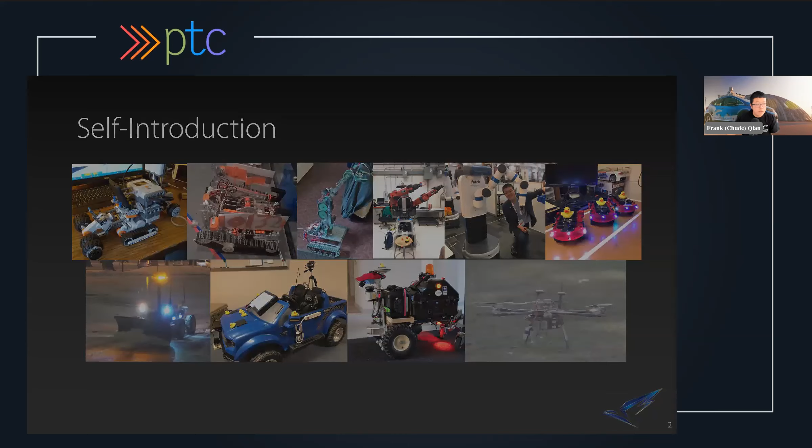So a little bit of background about aUToronto. What aUToronto does - we are a student-run autonomous vehicles team. The composition of the team is 100% student, plus some faculty advisors and advisors from General Motors. So we are actually a competition team sponsored by GM, which you can also see on my virtual background. That's the vehicle General Motors donated - it's a Chevy Bolt, 2017 model Chevy Bolt EV, and we modified it into, I will say, an autonomous vehicle under certain operation design domain.

So we get to go to Michigan actually a couple of weeks ago, and then participate in the competition. This is our 5th year that we have won, and this year we have won every single category except for 2 that we didn't win first place. So we won 2nd place, and the other we won 3rd place. So we have a very good track record.

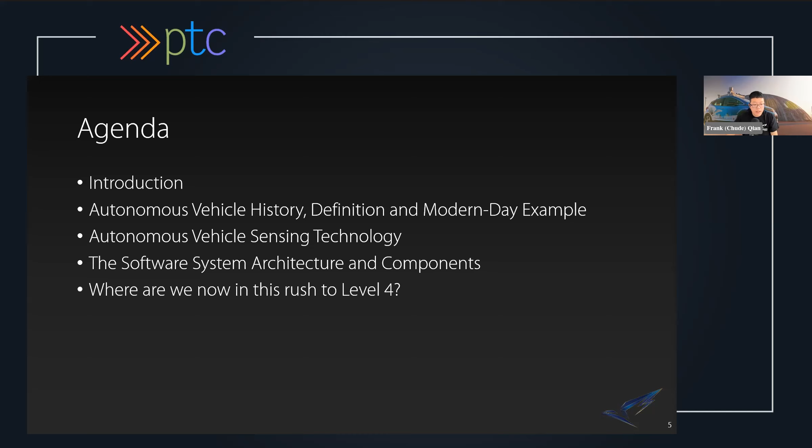So with that being said, let's start with talking about a little bit about autonomous vehicles - the history, the definition, and examples.

In contrary to most people's understanding, autonomous vehicles actually started way back in the early 1980s, where a couple of industry pioneers started developing hands-off autonomous vehicle systems. Namely, in the 1980s, Carnegie Mellon University developed a vehicle platform called NavLab, the leftmost vehicle, modified from what I think was a minivan. The vehicle performed only one task by then, and it was already a huge groundbreaker.

What it does is basically keep the vehicle within the lane. That's all it does. Compared to modern day technology, if you buy a car in recent years, it's sold as the feature of lane keep assist. It's also, if I recall correctly, a single agent system, meaning it assumes there are no other road agents such as vehicles or pedestrians. It's only by itself, and all it does is keep within the lane.

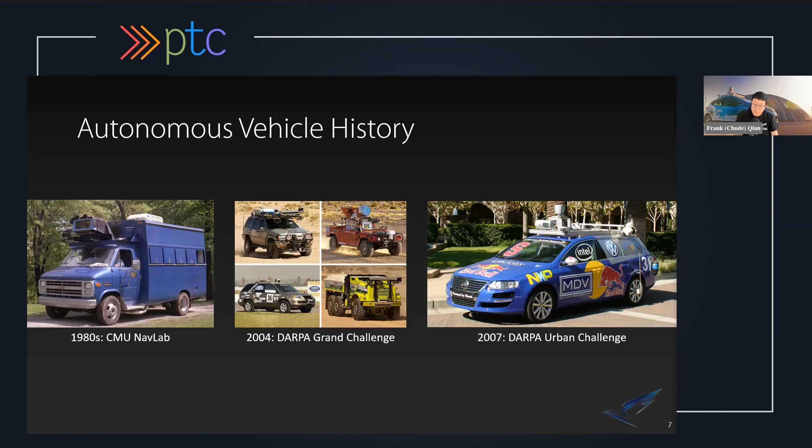This, I think, is featuring Stanford's submission for the DARPA Grand Challenge, and a lot of groundbreaking technology such as multi-line LiDARs were facilitated utilizing this competition. That brings us to 2012, where Google Project X started publicly testing their autonomous vehicle project, although development actually started right after the DARPA Urban Challenge. So the DARPA Urban Challenge, in certain people's minds including mine, is sort of the ground zero of modern day autonomous vehicle development.

In 2018, Waymo became the first company among a few others to start publicly testing the concept of an autonomous rideshare system in certain areas under an operation design domain. I'll talk about that concept a little bit later. But in a specific area, I think Phoenix, Arizona, they tested their systems and allowed users to ride their vehicles with a safety driver in the seat.

In the same year, something super unfortunate happened in the US: the first fatality accident on a level 4 autonomous vehicle. The vehicle was owned by Uber ATG. This also became a turning point in the discussion, shifting from just building an autonomous vehicle quicker to win the arms race, to more reflection on safety in autonomous vehicles.

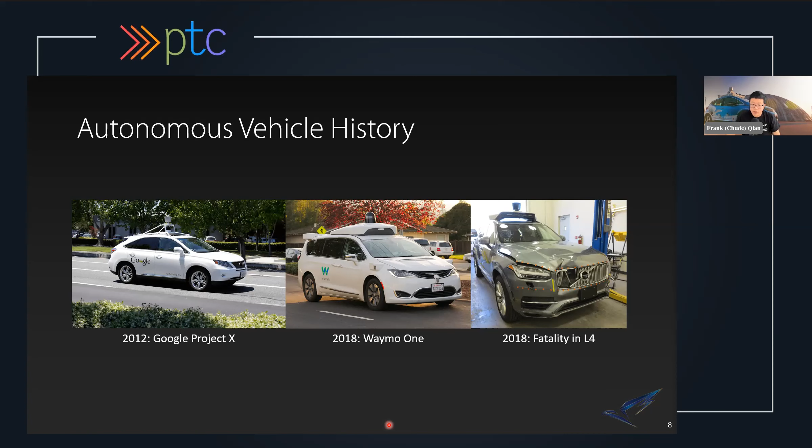Fast forward to 2022, the safety of autonomous vehicles is still a very crucial aspect and discussion point on the topic of autonomous vehicles.

I mentioned the term level 4. The level is actually a definition of autonomous vehicle autonomy by SAE International, Society of Automotive Engineers, which is like a governing organization on automotive engineering. They define 6 levels of autonomy in a vehicle.

For level 0 to level 2, on a high level summary, as a driver you still need to pay 100% attention on the road and constantly supervise the vehicle. You cannot zone out or not drive the car for a prolonged period. The car in level 2 might have features such as steering and brake acceleration support, like following in a traffic jam with stop and go, or lane centering, which keeps your car in the center of the lane. A keyword you might hear if you buy a vehicle recently for an add-on feature is adaptive cruise control.

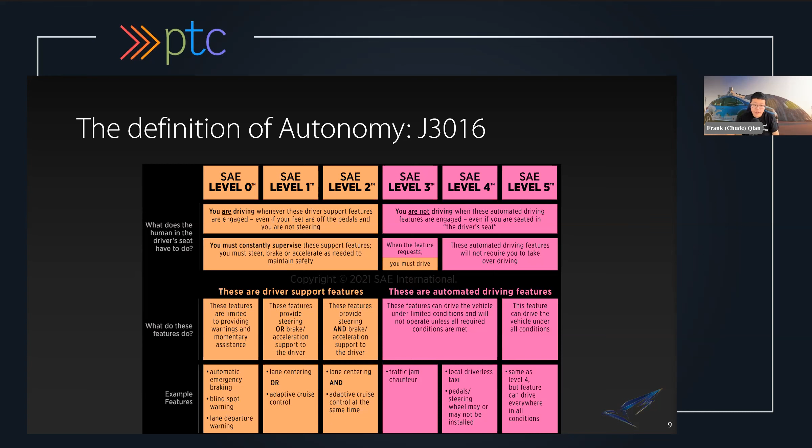So for modern day autonomous vehicles, or more specifically modern day autonomous rideshare systems, there are a couple big players. Waymo, formerly known as Google Project X, was the first to start. They started in Phoenix, Arizona, and I think they have now moved further to San Francisco, California, and a couple other regions for small-scale testing.

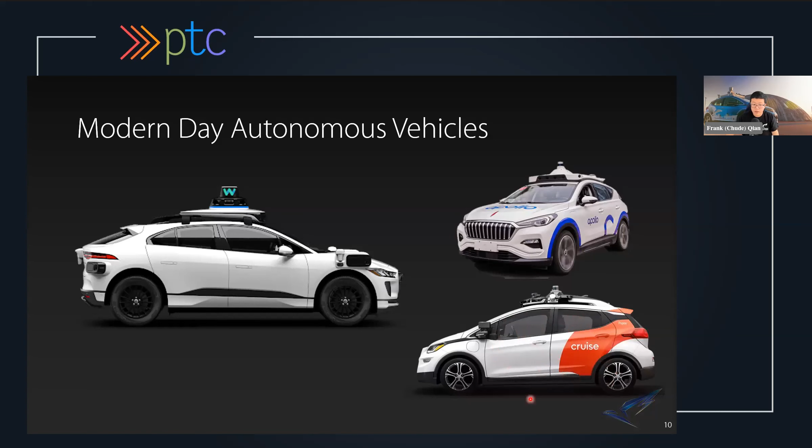Two new players rose up in recent years: Apollo, a company from China under Baidu, and Cruise under General Motors. Both of them started publicly offering rideshare in a given geographical region earlier this year. If you look very closely, you'll notice the Cruise car is also based on a 2017 Bolt EV, similar to what we have for our Zeus vehicles. So there are a couple things in common, and a handful of things that are totally different, comparatively speaking.

At this point, people in the audience are probably thinking, well, what about Tesla? As of a couple days ago, Tesla's autopilot system was actually being openly investigated by NHTSA, the governing agency for the safety system. One interesting aspect of Tesla's approach to safety was that, on average in Tesla's crashes, autopilot aborted vehicle control less than 1 second before the first impact. What that means is, technically speaking, their vehicle was not in autonomous driving when the collision happened.

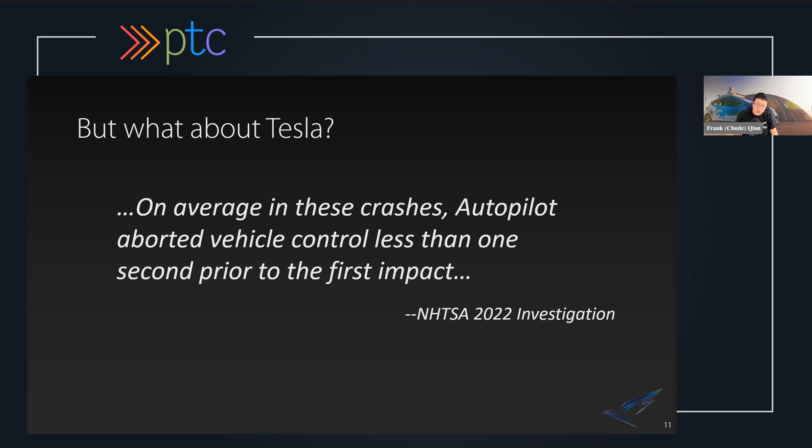So their track record, technically speaking, should be good. But in all honesty, this is very reckless and irresponsible behavior on Tesla's part. And in actuality, at least within academia, Tesla's approach sits at most at level 2.5 autonomy. There's plenty of reports and research on that front.

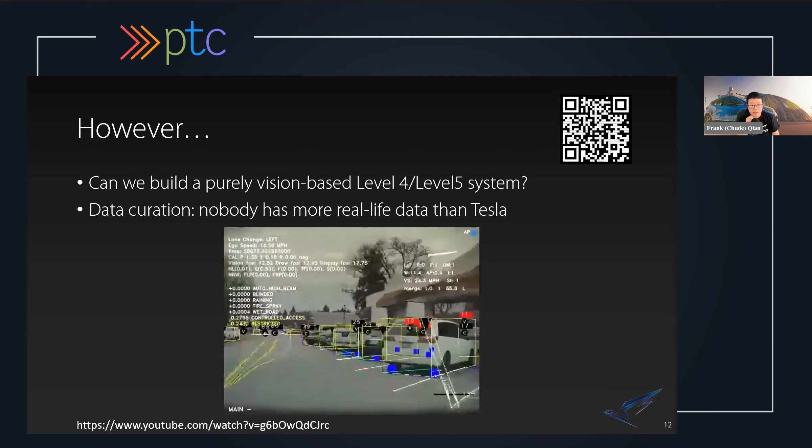But we do have to give Tesla some credit for their system design and approach. I have a QR code up there that links to a talk given by Tesla's head of vision engineering. It's a pretty remarkable system that they were able to build with only a camera system. This prompts a bigger discussion: what sensors do we actually need to build autonomous vehicles? Can we build a fully autonomous vehicle with only camera systems? Because we human drivers only use our eyes, which is somewhat comparable, in a horrible way, to a camera, but our human eyes can do much more than what a camera can do.

Another very interesting aspect we shouldn't disregard, even though Tesla's marketing team has been sort of falsely advertising their product, is the actual potential for Tesla as an entity with their data collection on all these vehicles already on the road. They have the largest fleet in the world across all autonomy companies. So they can do a lot if they can solve the problem of generalization in vision, and potentially change the way we see autonomy sensor systems. But for now, they remain what they are: a very cool company with an over-exaggerated marketing scheme.

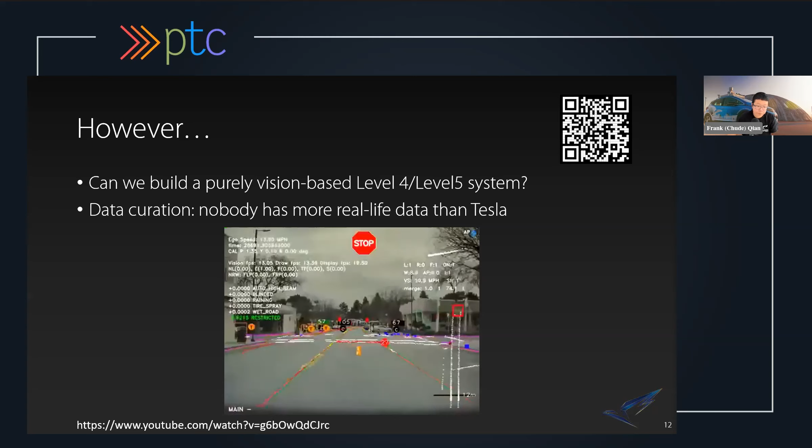Another question when you talk about autonomous vehicles that has to be addressed is, why autonomous driving? Why would we want to give up the fun, per some people's mind, of driving to autonomous systems? It turns out there are multiple studies that can back this theory, that autonomous driving can further improve road safety. If the implementation is done right, the reaction time for an autonomous vehicle is much faster compared to a human driver.

It can also increase productivity. Imagine one day when level 5 autonomy is out there and you don't actually need to drive. If your commute is 30 minutes to work, for that 30 minutes you can do all sorts of things. But obviously, I strongly urge you not to do that in vehicles these days, because none of them have the capability to deliver the safety idea.

It can also increase accessibility. So for some elderly people where they might have to have someone drive them to some places, they now can use autonomous rideshare vehicles to bring them to where they need to be, such as a doctor's appointment, or just go outside where they're living and have some entertainment.

Autonomous driving can also reduce cost, although this is sort of a double-edged sword, where if you reduce costs by cutting costs from paying a human driver, some people will not be happy and they will lose their jobs. So this becomes a double-edged sword quickly.

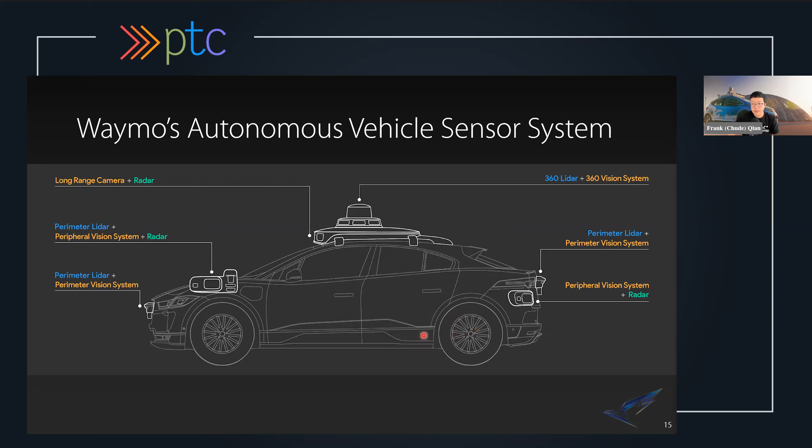So we've seen the impressive one. Let's talk about some of our own design. Keep in mind that the vehicle system we design is participating in a challenge similar to the DARPA challenge, called the SAE AutoDrive Challenge. Basically, 10 universities built their autonomous vehicles, and we tested at University of Michigan's M-City Proving Ground to validate our vehicle's capability. It's a subset of the full autonomous driving problem, as you will see in a couple slides later.

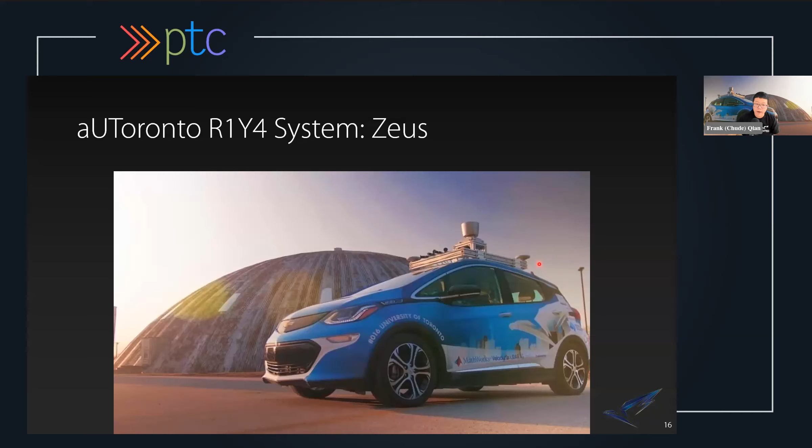What we have is only a sensor system on top of the rack. And if you pay close attention, our sensor system actually mainly focuses only on the front. We don't necessarily perform 360-degree surrounding coverage on our vehicle, since the competition is a single agent competition, meaning other than you, you're the only one driving on the road, and the interaction of your vehicle compared to other road agents is minimal. So that's how we can get away with our design.

It ties into the discussion of ODD, Operational Design Domain, which I will formally define a bit later in the slides.

So our Zeus vehicle system has a Applanix GNSS INS system, a Velodyne HDL64E LiDAR, which for this one, most of the autonomous vehicles you see in 2018, 2019 have that - it's sort of a standard design. And then we have a handful of cameras providing coverage. Note that we actually don't use radar on this version of the design.

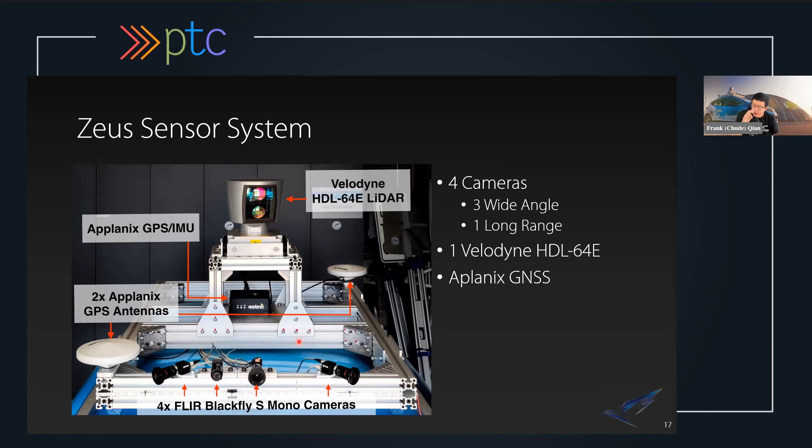Fast forward to this year - it's a 4-year per round competition, so this year marks a new round with some new rules implemented. For lidars, we have to use Cepton's micro motion technology lidar, so we no longer use a giant 360-degree lidar.

This is our test and validation system we designed over the past year, and it has achieved very good results for the competition. The system utilizes 3 lidars on top to provide similar coverage looking in front of the vehicle, the same GNSS-INS unit on the rooftop, and a similar but more compact 4 camera configuration - 3 wide angle and 1 long range camera.

For our radar, we have 3 radars providing coverage on the bumper area, since you don't necessarily have to mount your radar very high, at least for the brand we got. We also put another additional lidar on the bumper to minimize the blind spot. Keep in mind this design is also under budget - what we're doing is a minimal viable design, basically a system designed with the smallest amount of money that can provide the maximum performance.

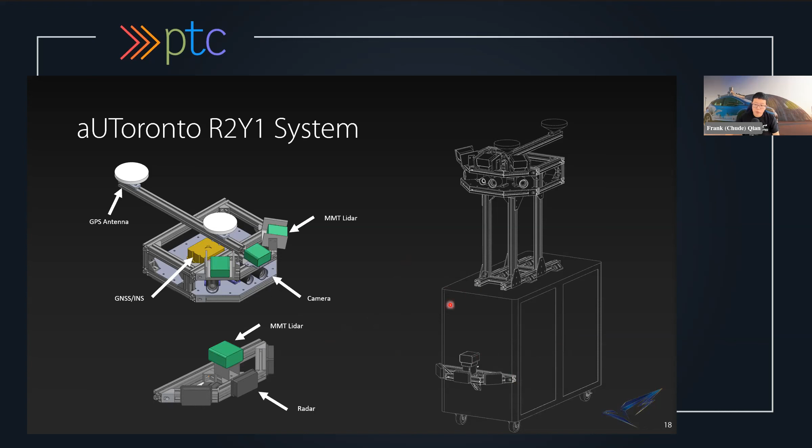So what are we gonna do next? This is probably one of the first times we have shown this publicly - this is our design for next year's competition, where we'll feature more lidars to provide more coverage and minimize more blind spots. We'll use 6 lidars in total, 4 cameras, 3 radars, plus a GNSS-INS system on the vehicle to provide about a full 180-degree coverage in the front. If you look at the 2 slides, you can see the design is pretty much transferable to what we built.

So let's take a look at the sensing technologies one by one.

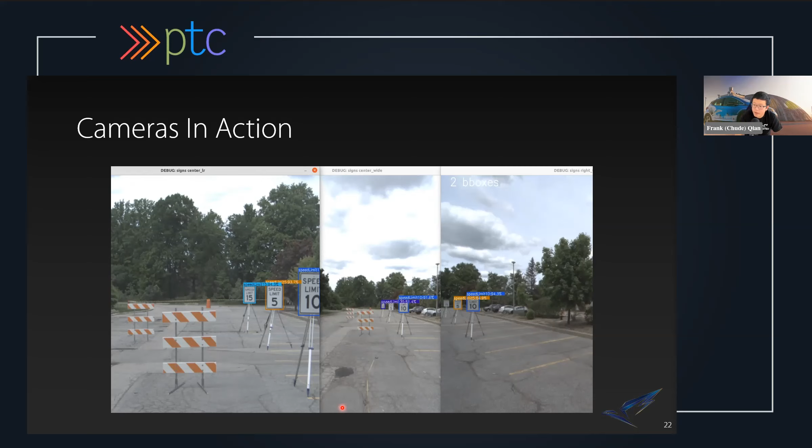Back then, a very popular modality of LiDAR is called spinning LiDAR - there wasn't an actual academia name, it's just what we previously called them. I usually call it spinning LiDAR, which involves a mechanical component that spins around.

How LiDAR works is it shoots out a laser, getting bounced by a movable mirror so you can change the reflection to where you want it to shoot. It shoots at an object, and the laser returns back to the mirror and onto a receiver. Through how long you shoot out this laser beam and how long it takes to travel and bounce back to the receiver, you can very easily tell how far away an object is, and that becomes a point on a point cloud.

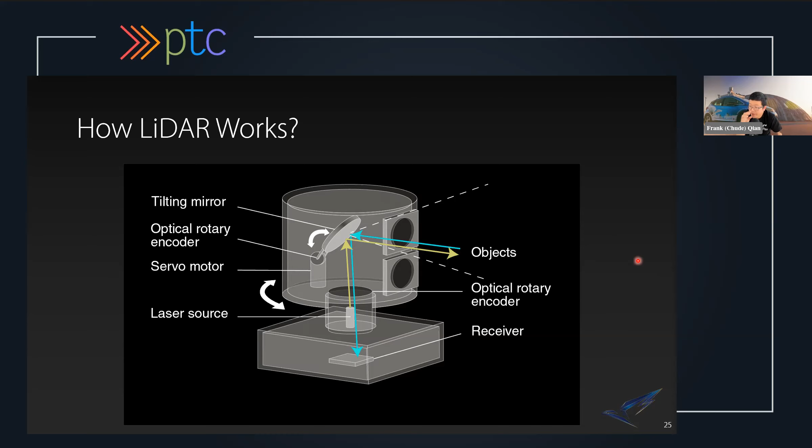So this is another example of the LiDAR on my virtual background. You can see there, and this is how a Velodyne 64 LiDAR works.

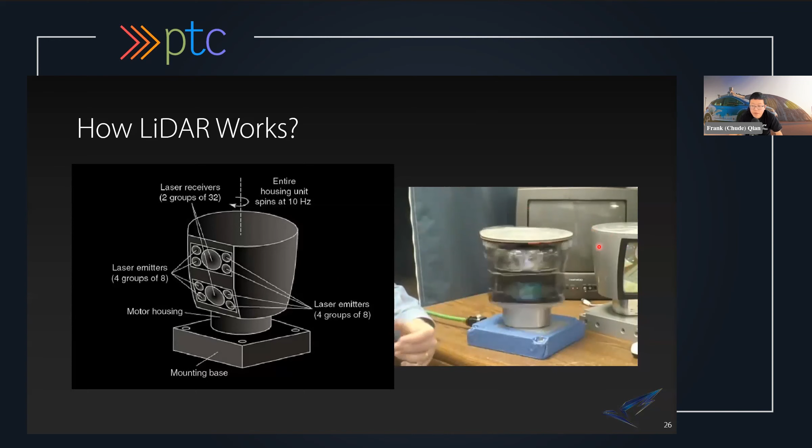It's actually quite an engineering marvel back then. As you can see, it basically spins to provide 360 degree surround view. It uses 4 groups of 8 laser emitters and 2 large receivers, as you can see on the image, to receive the points, and then it spins on top of the vehicle, providing 360 degree LiDAR coverage. This was for a long period of time the standardized industry standard for LiDARs.

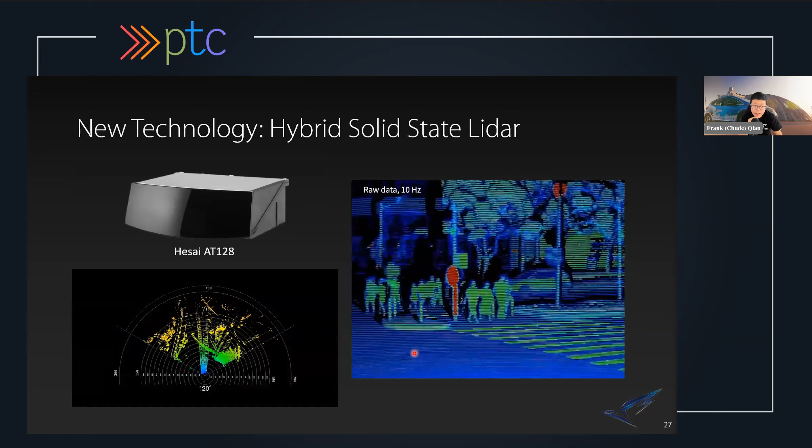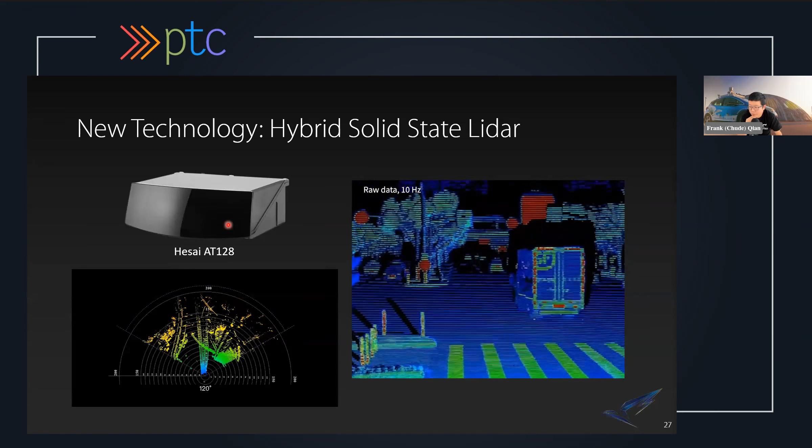However, as you can probably tell, there's a lot of moving mechanical components involved in these LiDARs. So more modern day LiDAR systems involve what's called a solid state LiDAR. A very popular brand these days is Hesai's AT128 LiDAR. In fact, a couple of the car manufacturers already integrated their LiDAR system onto the vehicle, so it's one singular unit. What they have is a MEMS chip to shoot out the laser and receive it. So there are no more major mechanical moving points that can mechanically fatigue over a long period of time, and it's more preferred by automotive applications.

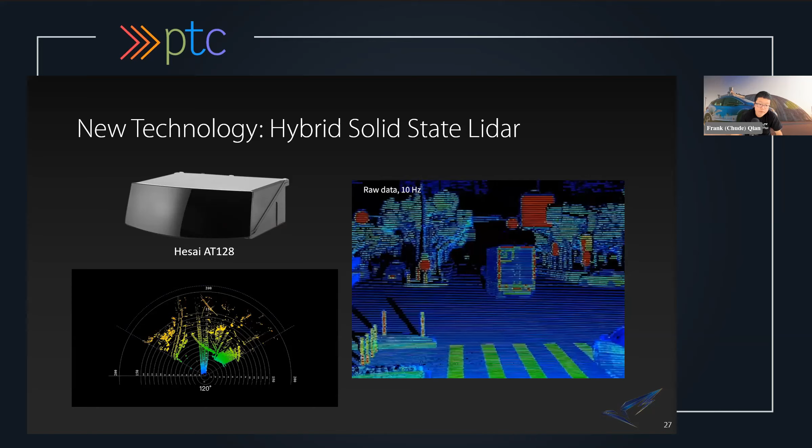For us, what we use this year is a different LiDAR technology called micro mirror technology, in which the LiDAR has mirrors inside that vibrate, and you can see it produces decent enough coverage for the objects, but it has this very interesting grid-like pattern. That's a very unique characteristic of the micro mirror technology, at least in this day and age, by Cepton.

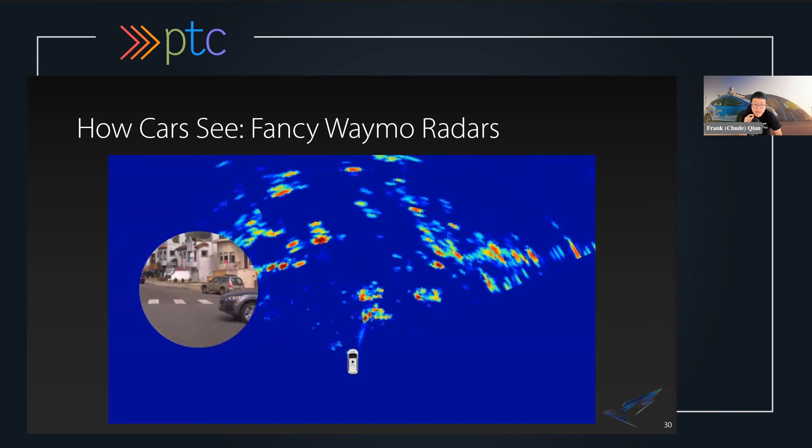Another very popular sensor modality on autonomous vehicles, or a standardized formula autonomous vehicle construction, is a radar system. Unfortunately we're not allowed to talk too much about the specific radar we use, but this is a demonstration on Waymo's vehicle radar system. They actually have a very fancy system that allows you to process the radar information as a Doppler range image, which is more human readable and machine readable compared to what we have.

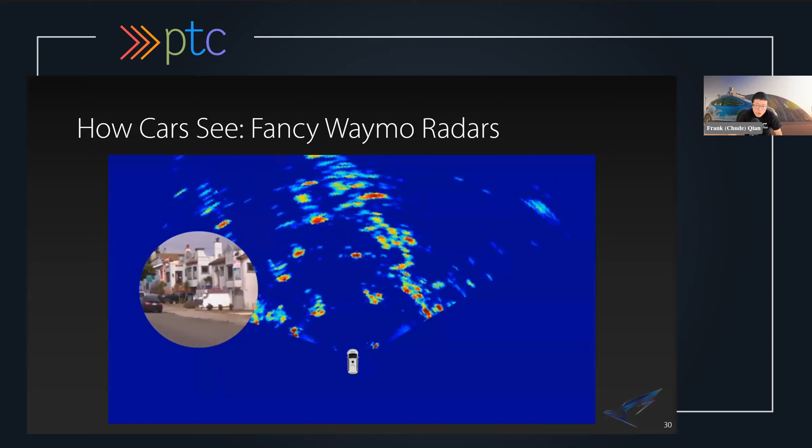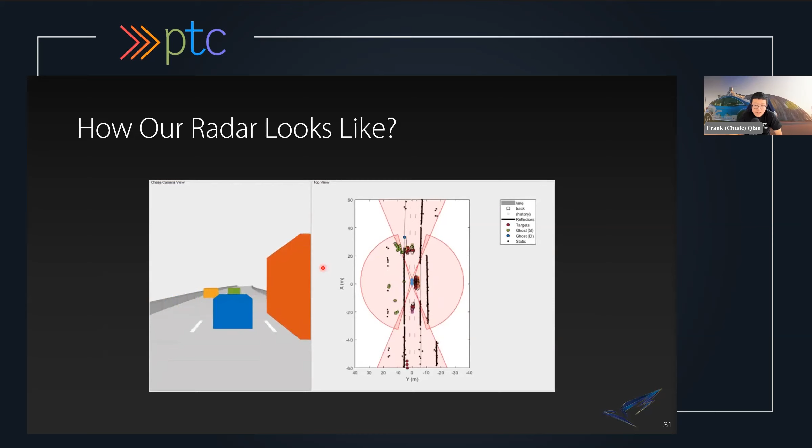What we have is called a radar target point. This is an illustration of radar - you get similar to a point cloud, except these points are much sparser and they float on the surface of objects. With radar, sometimes you get ghosting effects and multipath reflection effects, which are big words, but just think of them as points where they shouldn't be, but they are there.

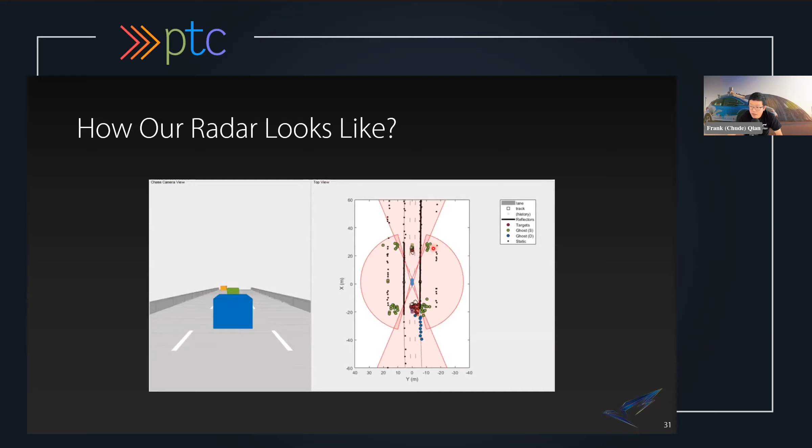For radar, the advantage is that you get back the object's velocity directly alongside its position information. Each of these dots actually contains velocity information that you can read on our radar system.

So how does that work? You can go very deep into the mathematics, or you can easily understand it as: similar to LiDAR, you shoot out a radar 77 gigahertz beam, and when it hits an object, it bounces back. However, if an object is moving, the frequency will change, and through that frequency, or the Doppler effect, you can infer the vehicle's velocity. Think of it as when you're standing on a street and there's a police car with sirens driving fast next to you, you'll hear the tone shift a little bit. That's basically, on a very rudimentary level, the similar idea of how automotive radar gets velocity information - it looks at the frequency shift.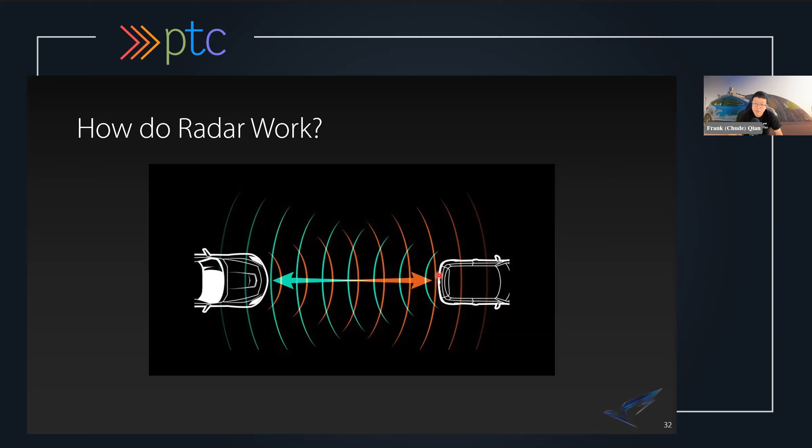For those of you who follow technology, these are very standardized sensing technologies that have been out there since early 2014, 2013 even. Next, I'll show you a little bit of the bleeding edge technology of sensors.

Radar gives you instantaneous velocity. So why don't we combine the two? It turns out you can also use laser to look at a very broad scope of frequency shift in the laser space, and you're able to get both good point clouds as well as the velocity information of each point, which is super nice.

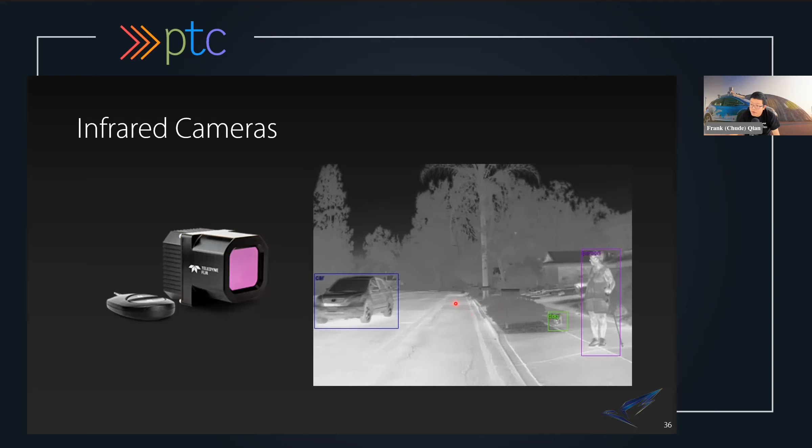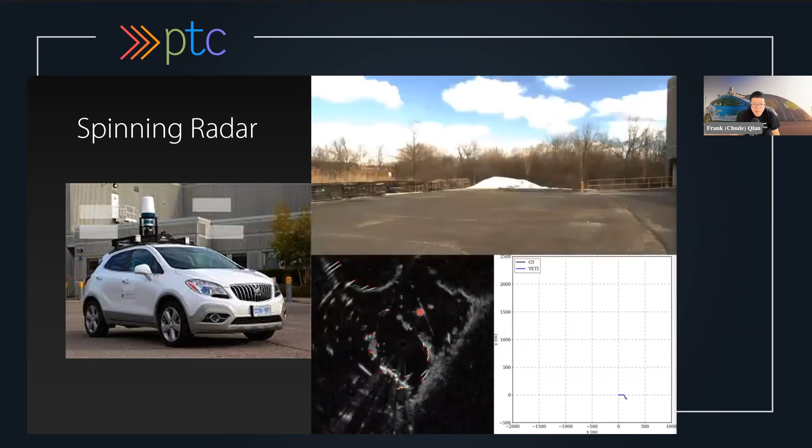And then lastly, there's the spinning radar. It's basically a two-dimensional scan of the environment using radar technology. As you can see here, you can roughly tell the outline shape of the object. This is one of the test vehicles U of T has, called Boreas. As you can see, you can pretty much tell where the objects are, similar to LiDAR, but this is in a radar sort of domain.

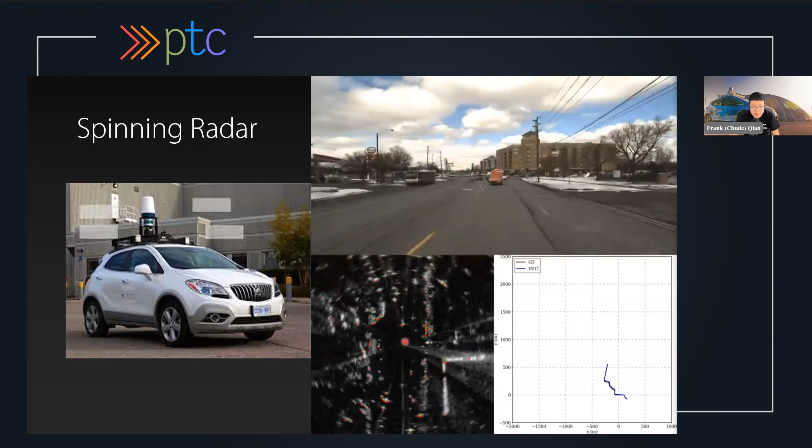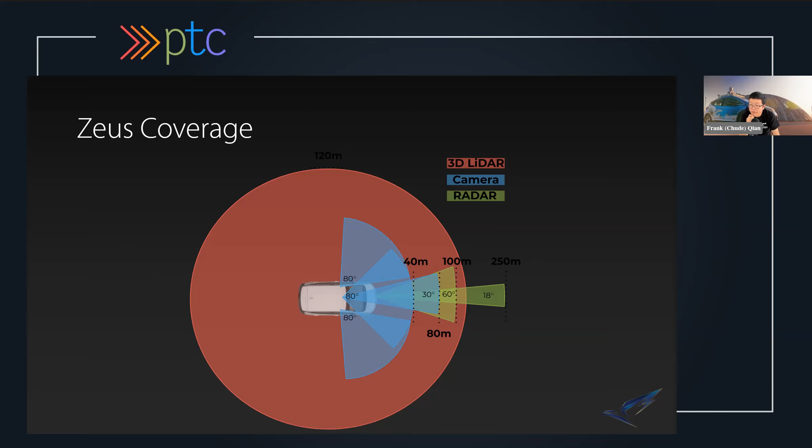When talking about designing a sensor suite for an autonomous vehicle, another very important aspect you need to think about is sensor coverage. Waymo has full 360 coverage, nooks and crannies around the vehicle. For our vehicle, Zeus, we have 360-degree coverage introduced by LiDAR. Our camera only covers the front 180. We did attempt to put radar on there, but eventually we didn't use that. So that's the Zeus coverage.

And then for the perception cart's coverage, you can see here. Our cameras provide about 160 degrees horizontal field of view. Radar is about 180, and then LiDAR is about 150. This is all the sensors - for the camera and LiDAR, this is analyzed using the top sensor rack, and the radar is using the bottom one.

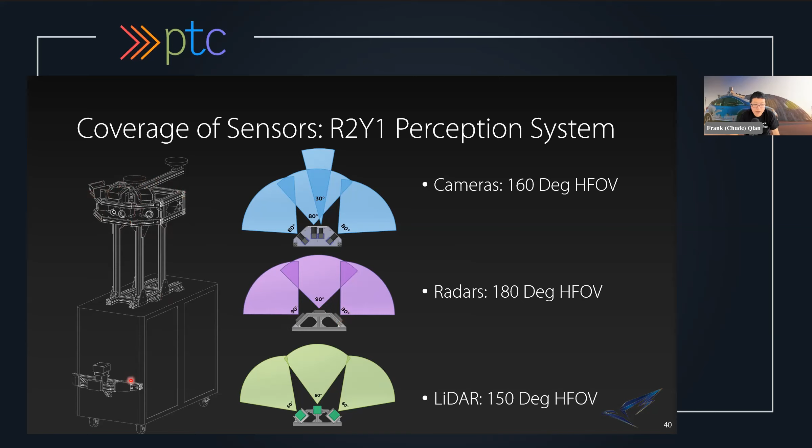So how can we get away with only having that little sensor compared to Waymo's design? Well, I have to introduce the concept of operation design domain. Operation design domain basically defines a set of operation areas that your vehicle is expected to handle and operate in. For our scenario, it's very simple - it's based on whatever the competition gives us. All we need to do is drive within the lane, detect traffic lights, handle pedestrians crossing the crosswalk, with only one pedestrian expected at a given time, and handle deer jumping out of the road in front of our vehicle. So that is our operation design domain.

I previously mentioned that for actual autonomous vehicle companies, there's also a geographical fence idea where Phoenix, Arizona is the first area validated because it's most likely always sunny there. Although Waymo nowadays has also expanded their weather coverage to pretty much everything, a safe approach is you define your operation design domain, validate it rigorously, and then slowly expand your operation domain. That's why we get away with what we have, and that's a very important concept in autonomous vehicles. In the upcoming years, you'll see cars selling autonomous driving features, but they only support certain areas of a geographical region, bounded by the operation design domain. Some cars might not work under rainy or snowy weather. So that's an important thing to look out for.

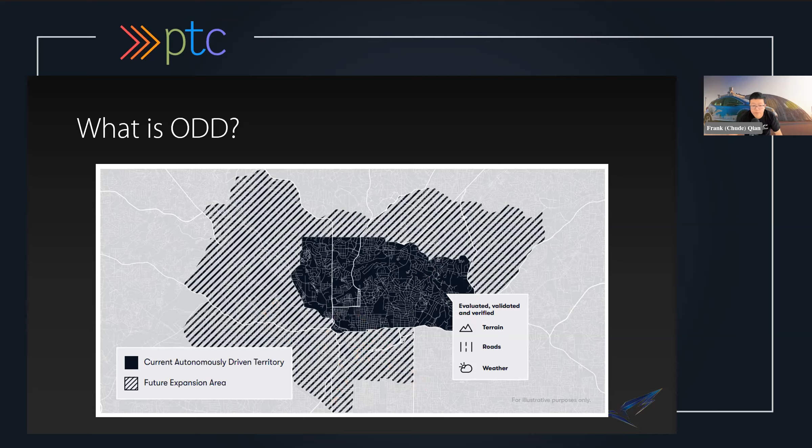So a very basic robotics system can be defined as follows. You have a world or a plant, you have your sensors on your vehicle, you have your actual vehicle, and you have the actuator or motors or execution components on your vehicle. Your sensors look at the world and do something called perception, or perceive the world. From the outcome of the perception, you make a plan based on the perception. You hand it over to control, and the control executes the plan, and rinse and repeat.

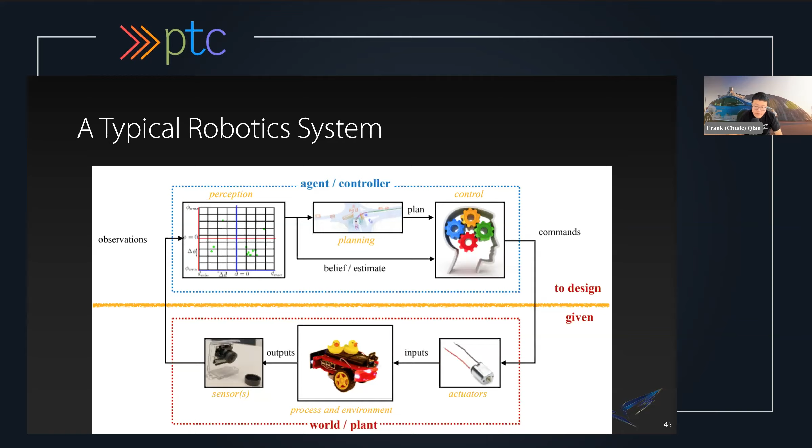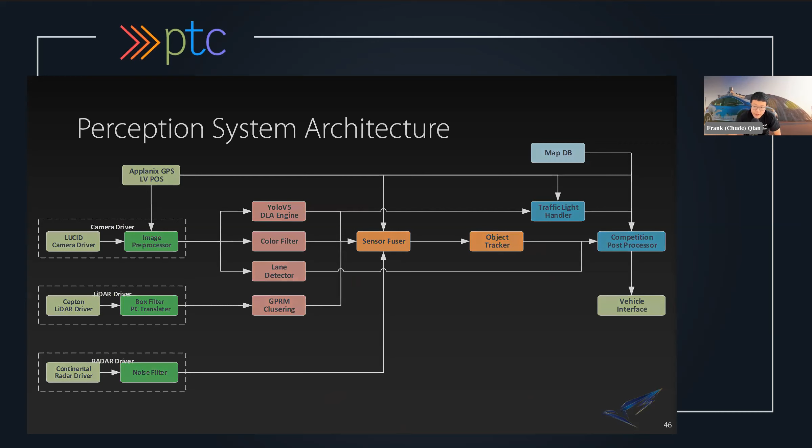So for all these components to talk to each other, what we use is something called ROS, Robot Operating System, as our communication middleware. How can we have sensors talk to each other? It turns out ROS provides a very good communication layer for our components to talk to each other. If you're interested in going into the robotics world in the future and want to learn some programming skills or basic knowledge, ROS is something you will definitely cross paths with if you go to a university or college to learn robotics. So if you're interested, I urge you to practice using ROS components, simulators, and robots.

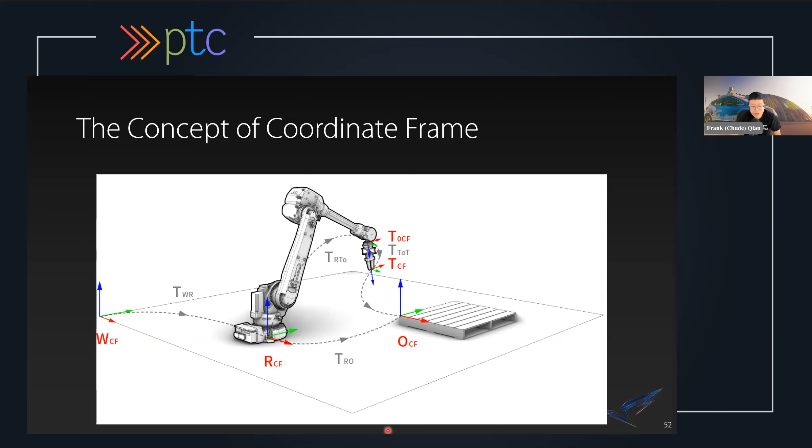Another very important aspect we need to talk about is the coordinate frame. Different sensors have different perspectives. Imagine you're standing in a room facing slightly differently than another person in the room, things at your 3 o'clock direction might be at someone else's 4 o'clock direction, even though it's the same thing, just because you're standing in a different place and facing differently. That's the concept of coordinate frame in a nutshell. If you really want to drill deep into this, there's plenty of linear algebra and matrices involved, but for the interest of time, we're not going into that.

Now that you know what ICP is, you can understand this better. We have two sources of information, and we need to find a description that aligns them so everyone is talking from the same perspective. It turns out when we have 4 LiDARs, each mounted differently and pointing differently, we need to do ICP so we can generate a nicely calibrated scene where all the LiDARs are describing the same thing in the same frame.

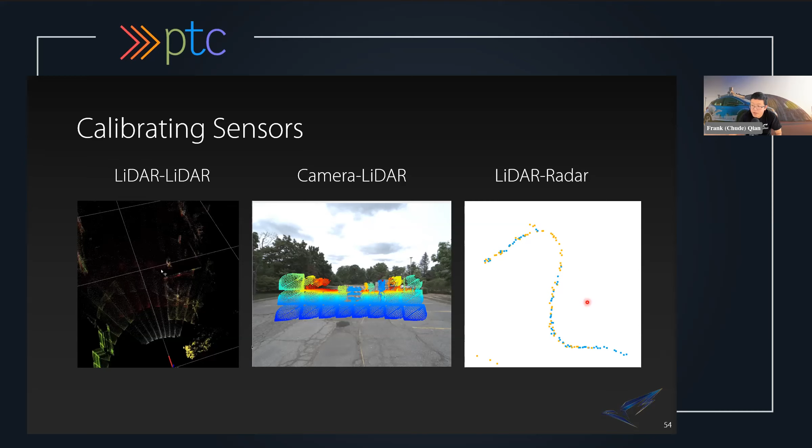This is how we do the LiDAR and radar calibration. It's actually quite fun—you have someone running in front of the sensor system in a weird S-shaped trajectory. Since it's the same object, both your sensor systems, LiDAR and radar, should have this trajectory described for that same object.

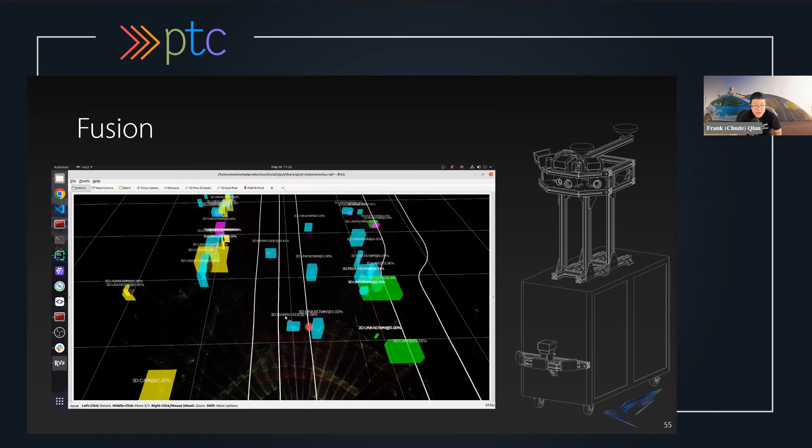From that, we're able to pass the information onto each other, and provide this information in Unity with the same uniform descriptor, illustrating it more visually. This is me walking in front of our LiDAR with our camera. You can see our camera both sees me, and our LiDAR also sees me. That's sensor fusion in a nutshell.

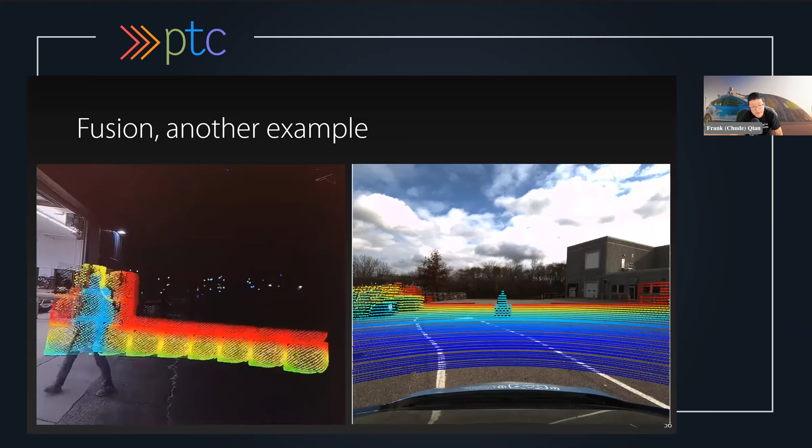And then there's a human standing there—this is the LiDAR, and you can see the human gets picked up in the pattern, so you can lay the points on the human. Once you have that information, through some very fancy math—actually technology dating back to the 1980s—you can basically track the object, and you can see each object has its own unique identifier number. So that's the perception system in a nutshell.

For the next couple topics, I'm probably going to go a little bit quicker.

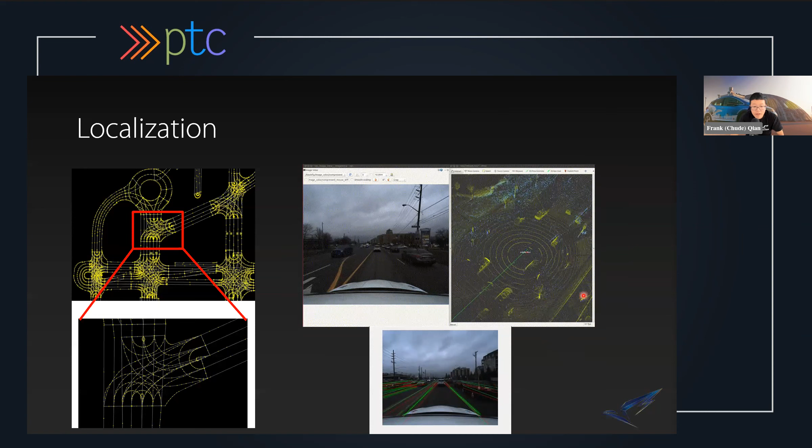Next, I'll talk a bit about the planning aspect of things. In a nutshell, planning can be dissected into 3 problems. You have a global planner, whose responsibility is to tell you how to go from A to B. For example, imagine you're at home and want to go to school—the global planner will tell you to take road A, then road B, then road C, and that will get you to your university.

Finally, for an autonomous vehicle, you also want your vehicle's trajectory, which describes how it drives around, to be smooth and comfortable. Obviously you don't want to sit in a car being driven like a roller coaster. So you also add a velocity profile generator and a path optimizer to make the ride comfortable.

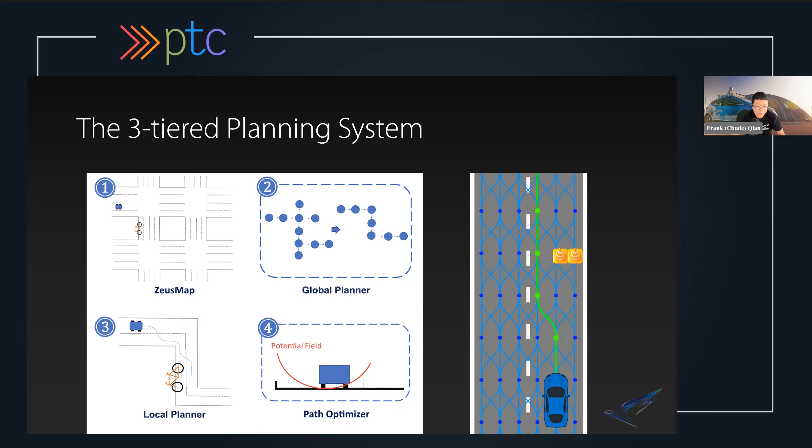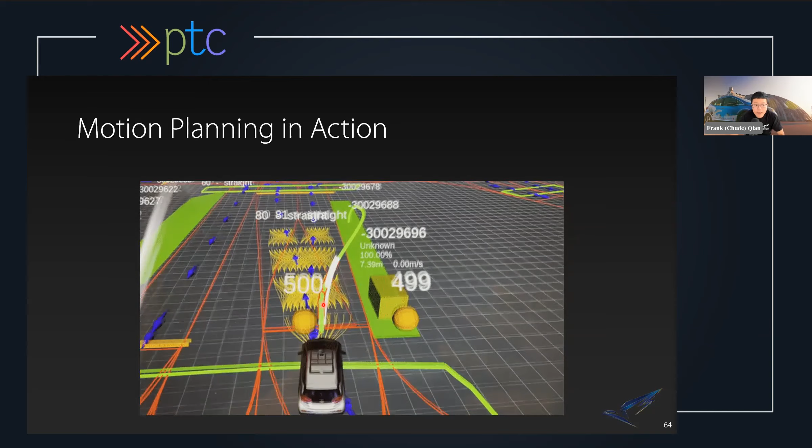This is a quick demonstration of our planning system from round 1. We haven't built our new planner yet, so this is how we manipulate a parking maneuver. You can see the proposed trajectory is actually very smooth here. With all these put together, you get an autonomous vehicle.

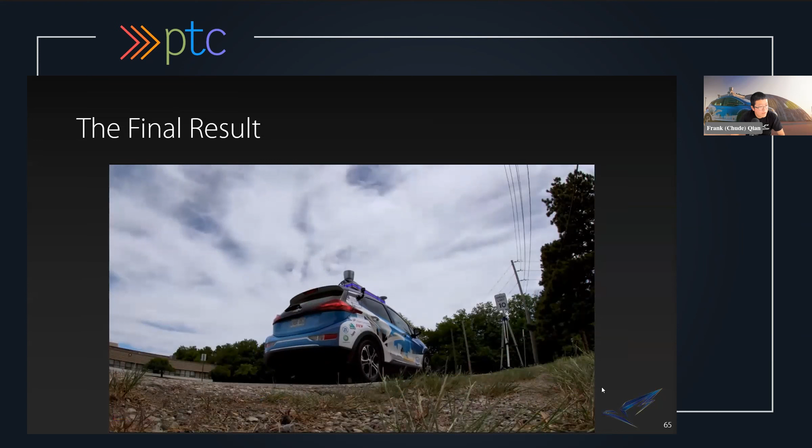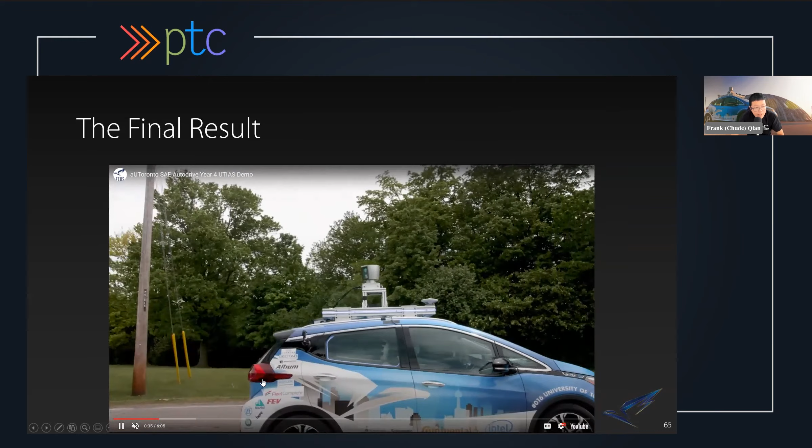I'll show you a couple examples. Here it's going through a corner, and you can see how we maintain the speed of the vehicle. We also keep on road, and the driver there is just for safety purposes in case the car goes wrong.

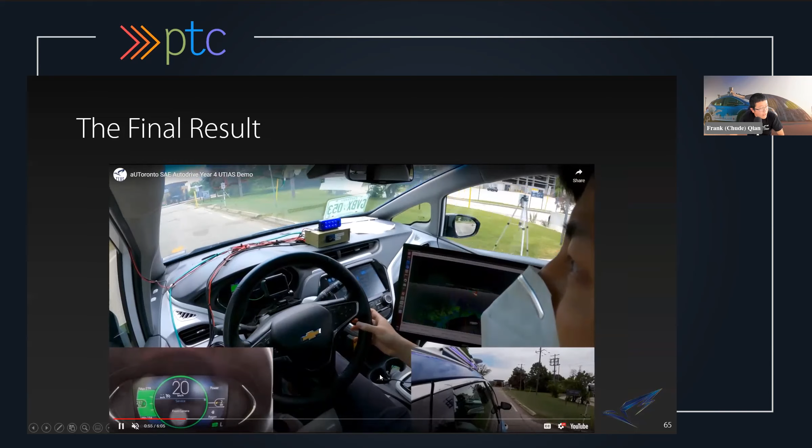Here we hit a 20 mile per hour speed limit. Obviously you don't want to be the person holding up traffic, so you can see our vehicle speeds up accordingly. The road is a little swervy here, so it goes around, then reduces speed since there's a speed sign of 15. You can see it starts braking even before it hits the point, and once it hits the speed limit sign, it goes according to the speed limit.

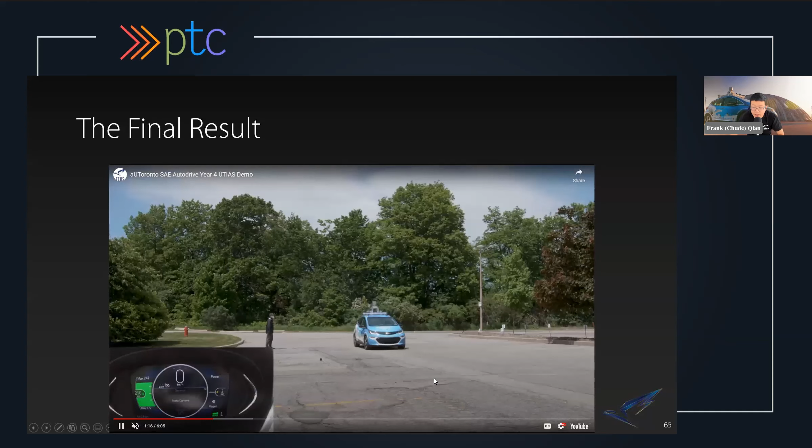Here it illustrates our round one's final vehicle doing pickup and drop off. Due to COVID back then, we can't have two people in the same car, so this is just a demonstration.

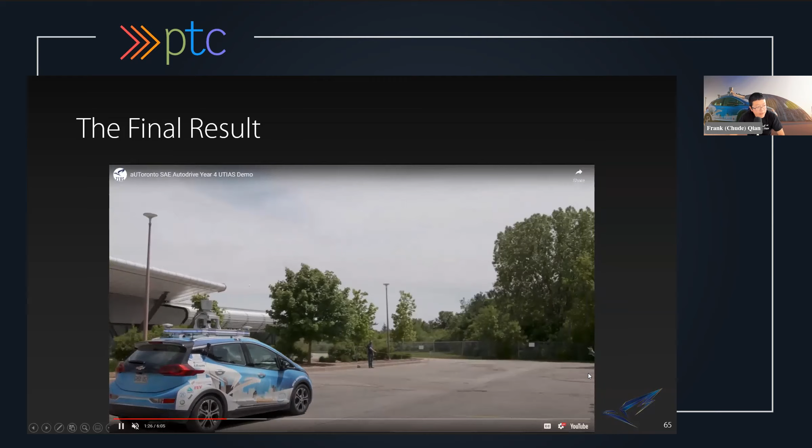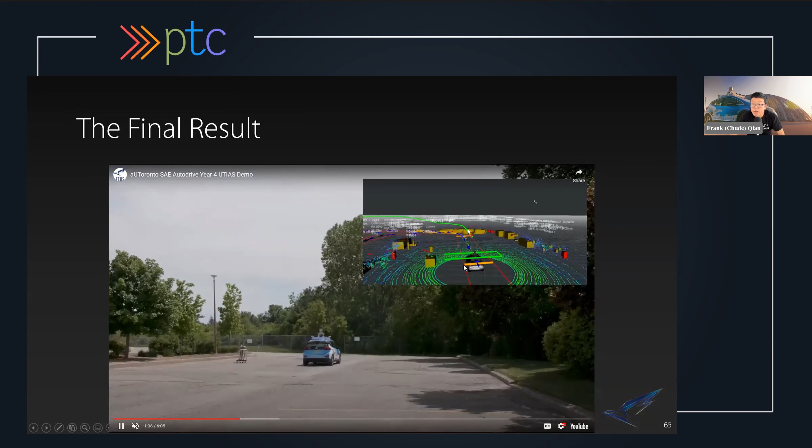Now the cool part is once the car drives further, there's a deer that jumps out onto the road. You can see our system recognizes that's a deer that has a velocity, so it expects it to jump up and takes the maneuver ahead of time. Here's another example where the car misses the deer.

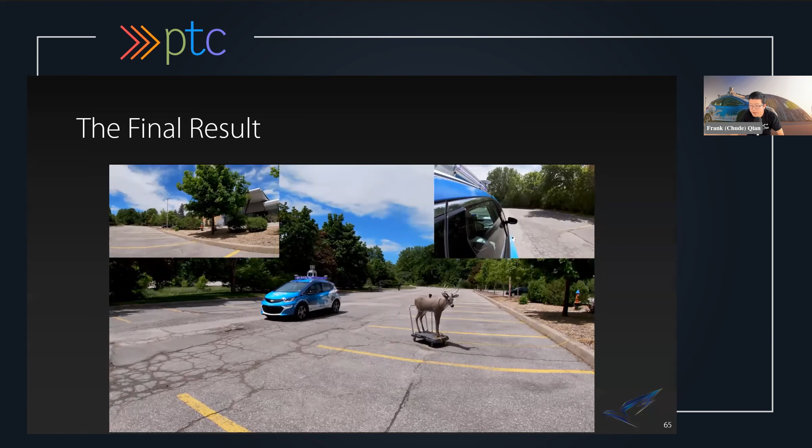So that's our system. Let's talk about where we are now - three main problems in my mind of autonomous vehicles nowadays. One is most modern autonomous vehicles are built scenario by scenario. If you've seen a scenario you haven't seen before, you add it into the scenario bank, and hopefully your system will learn to adapt. But we all know there are infinite possibilities in the world, so how do you solve that problem?

Another thing is adversarial weather. This is another main reason why autonomous vehicles haven't been in Toronto - most are developed in sunny California or sunny Arizona, because there's no rain, the sun is super bright, and roads are well painted. But in Toronto it's quite challenging. U of T has a research group - my affiliated research lab - starting the Winter project, which hopefully can bring autonomous vehicles into Toronto and Canada.

Another thing is proof of safety. Since 2018's Uber ATG incident, safety has been a highly emphasized area that people cannot overlook. Lastly, with safety and scenarios, how do we introduce public perception and public acceptability? Some people will lose their jobs because autonomous vehicles are a thing - how do we convince those people these are better changes?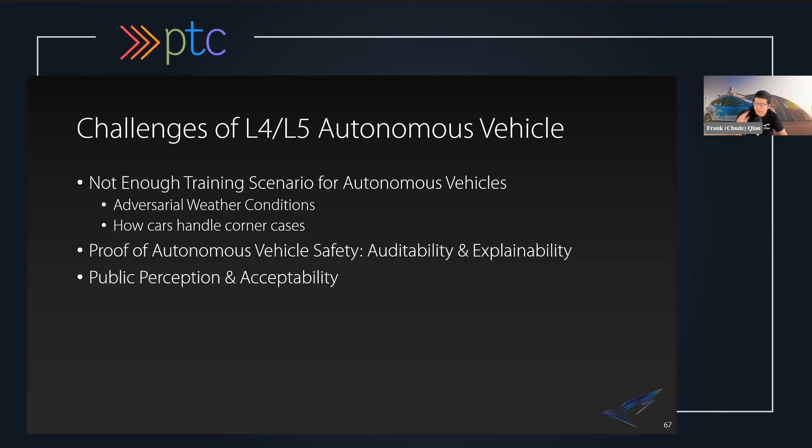Another thing is nighttime driving - this is what the discussion on Tesla is mainly about. Cameras don't necessarily see well at nighttime unless you custom build some imaging sensor that handles that, so having multiple sensors is definitely a plus, ensuring more safety in autonomous driving.

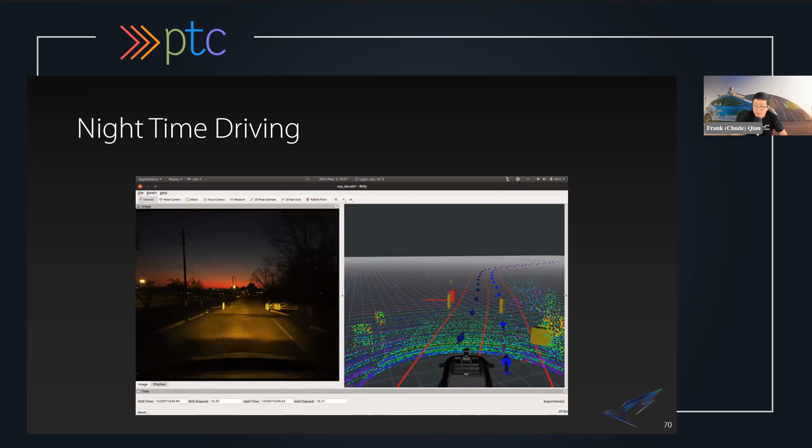Let's talk about corner cases. I'm going to play a clip here - this is from Waymo. I don't know if you can tell what's happening, but there's an elderly lady sitting on an electrical wheelchair, and she's chasing a duck. This is a very textbook scenario of how you handle motion planning - how do you handle scenarios like this? Some companies will say, we'll create a scenario with someone on an electrical wheelchair driving randomly on a road. But how do we expect these scenarios before we even put our vehicle on the road?

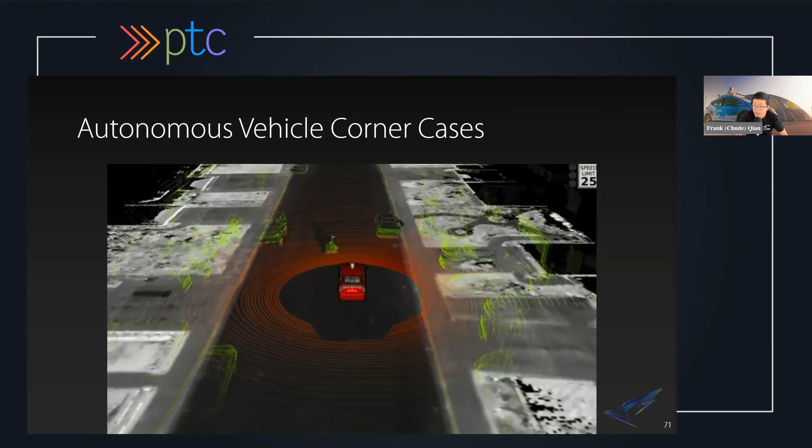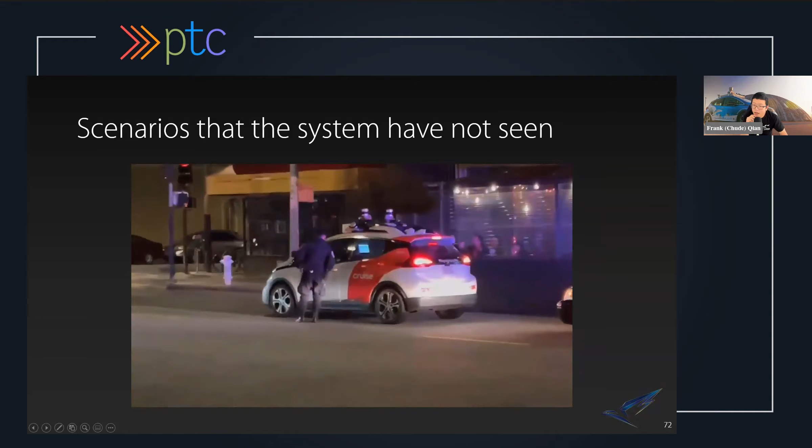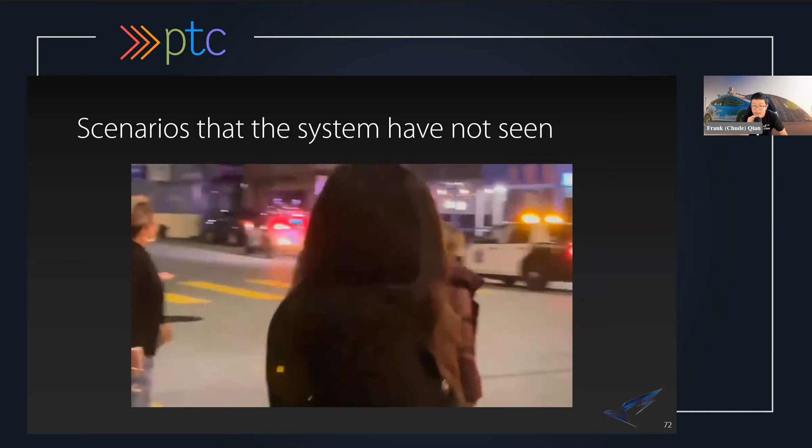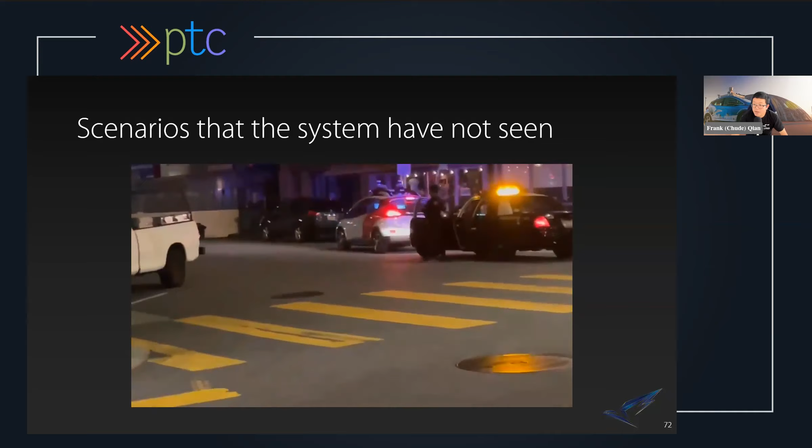And then this is another very funny video. So how do autonomous vehicles handle police pullover? Well, it turns out it can't right now. As you can see here is a scenario where the autonomous vehicle just literally evades the police stop. And the policemen have no clue why the car is just driving by itself and there's no driver in it. So both the public perception and corner cases like these, how do you encounter a police stop where the police is just doing human being things that's non-predictable?

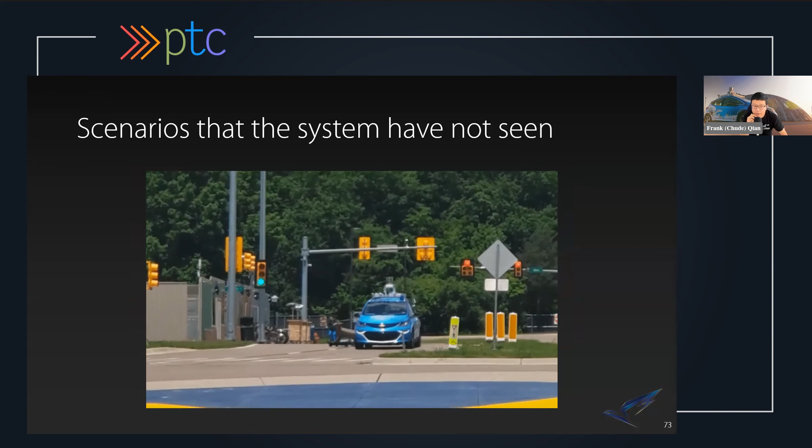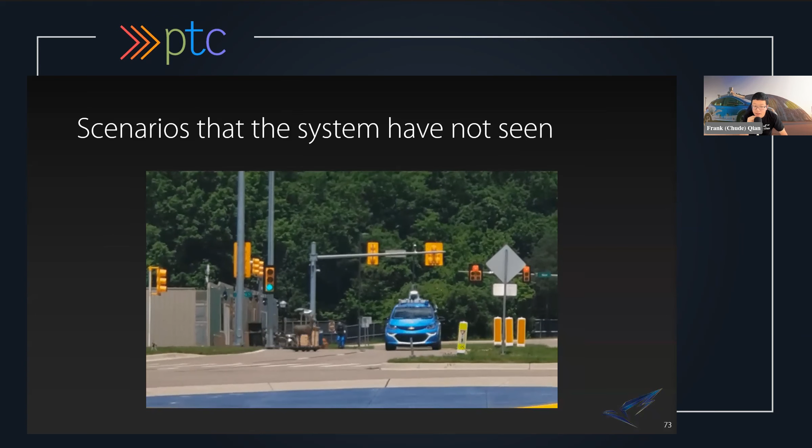And this happened to our vehicle. How do you handle animals running to vehicles? It's technically speaking not our fault, but we could have done better. We could have stopped earlier once we see there's a deer, or we could have just go faster and not go into it.

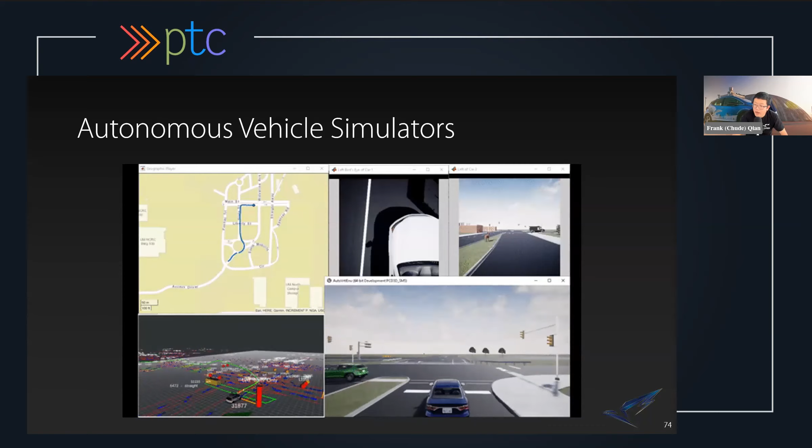And for bigger companies such as Waymo, they're obviously going to be more fancy on that. They have sort of learned AI agents, similar to those you play in Grand Theft Auto, those AI agents, but now they're actually more human-like. And then you put your car into those agents and let them just interact with each other and see what comes out.

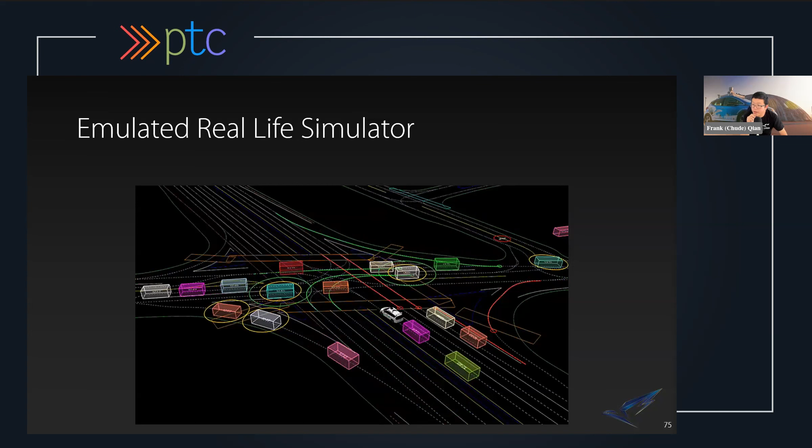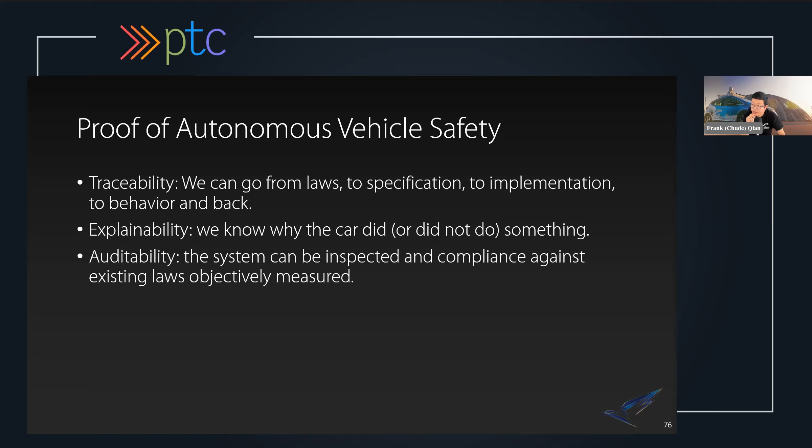So with that being said, some closing remarks. I know the audience is mainly for high school students and I think there are also some undergrads in the call. There's still quite a large number of work to be done in the field of autonomous vehicles, addressing the discussion of generalization. Don't just feel looking at for example, what Waymo has done and think autonomous vehicles is there, or look at what Tesla PR have said. It's actually farther than what we think commonly perceived autonomous vehicles is to us, if you factor in the discussion about safety and generalization.

So I encourage every one of you, if you want to pursue the field of robotics, or even more specifically autonomous vehicles, to always keep in mind that you're building an engineering product that is going to have an impact on thousands of people's lives. And safety should always be your first priority when you design a system and learn certain aspects. And also learn good math because you will have to use it for almost everything.